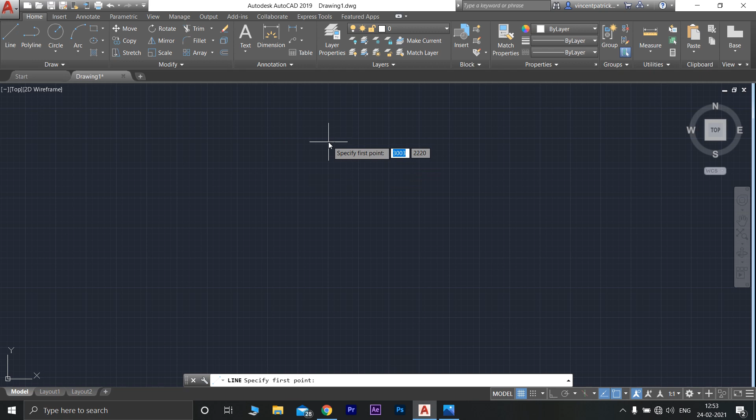So open AutoCAD. The first command you have to give is limits, and the lower left corner should be 210 and upper right corner should be 297. So the next command you have to give is units, and the precision should be 0. Okay, so now go to line, and make sure ortho is on.

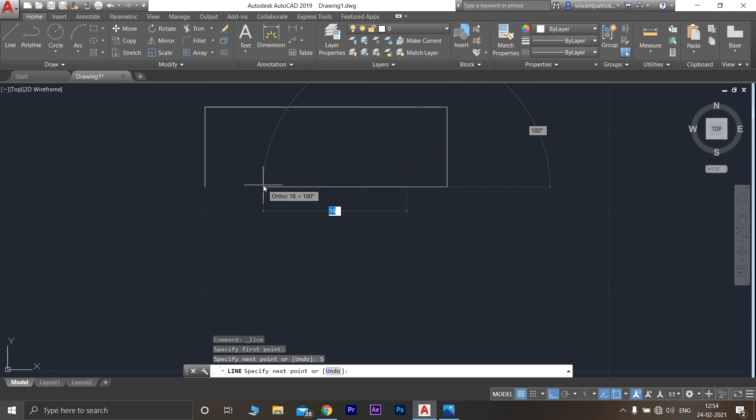So now the length of this one will be 30 and again 10. Before drawing this diagram, the length of this one will be 10, so the length of this gap will be 5 and 5. So yeah, again line, so 5 mm, 20 mm, and join this.

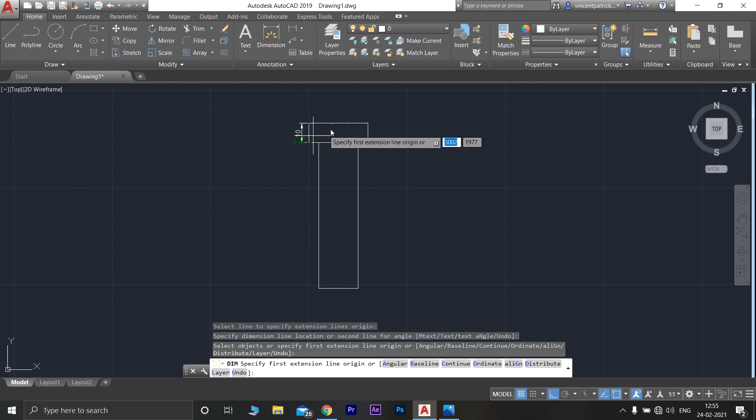The entire length of this will be 75. Go to here. So from this point I have to draw it for 75 mm. And then this will be 20. Now join this. So this will be the knuckle pin. Once completed, give the dimensions. This will be the knuckle pin. Dimensions we can do at the last.

So now we will draw the eye end rod, next one. Now the length of this is given as 26 mm. And the total length, check the top view, from here to this point it is given as 70, and the diameter of the circle is given as 40, so radius will be 20. So from this point to here it will be 20, so 70 plus 20, 90. The entire length of this will be 90.

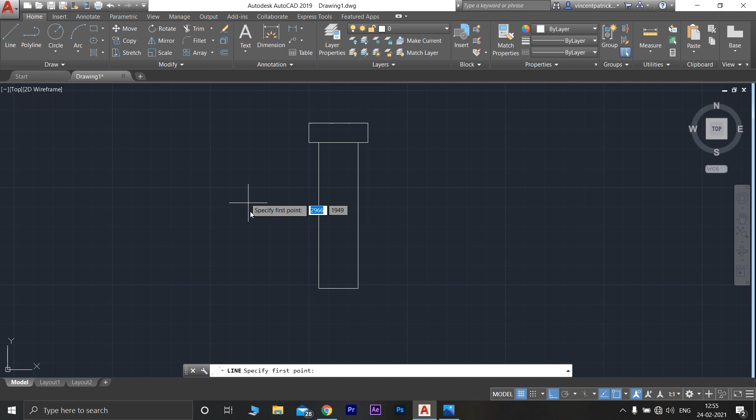Go to line. So from here I have to draw a line for 90 mm. So it's given as 26. 26, 90. So we have drawn this. Next, the length of this is given as 35 mm. So go to line. From here draw a line for 35 mm.

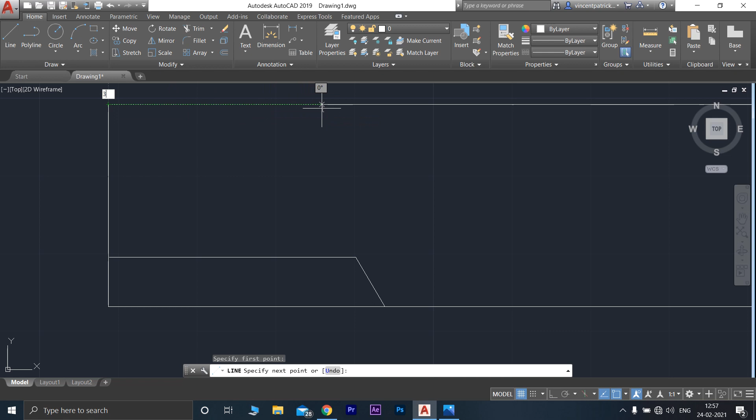So connect it like this. Same way you do on the other side. 35 mm. From here 6 mm.

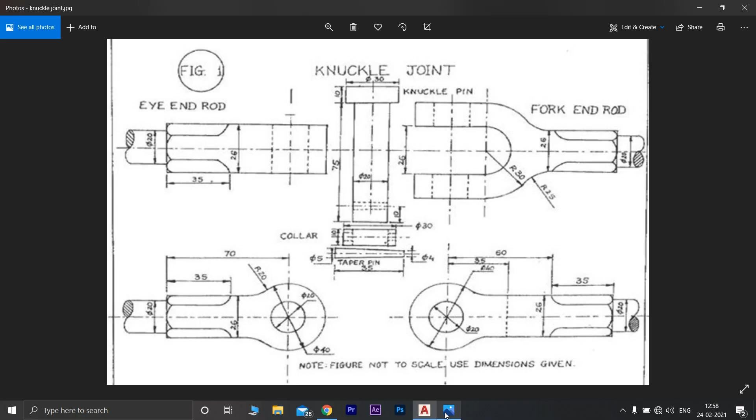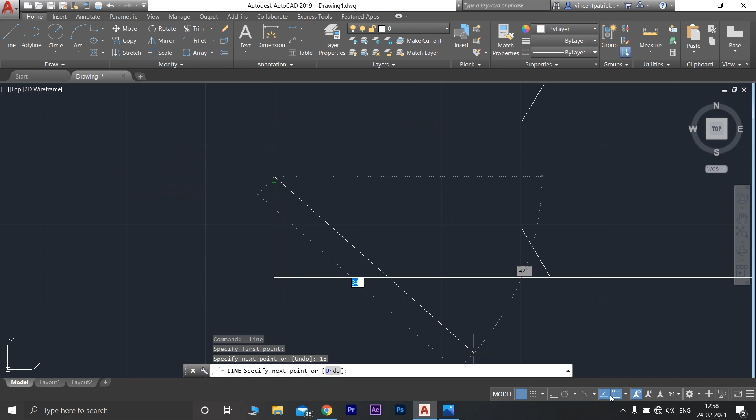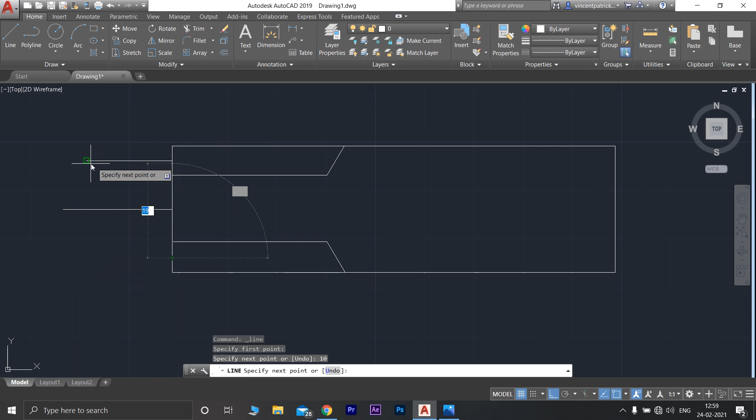Now we have to draw this by 20 mm length. So to here, create a center point that is at 13 mm. So the height is given as 20 mm. So go to line from here, 10 mm, draw like this, and from here 10 mm. Now delete this reference line. So this will be the eye end rod.

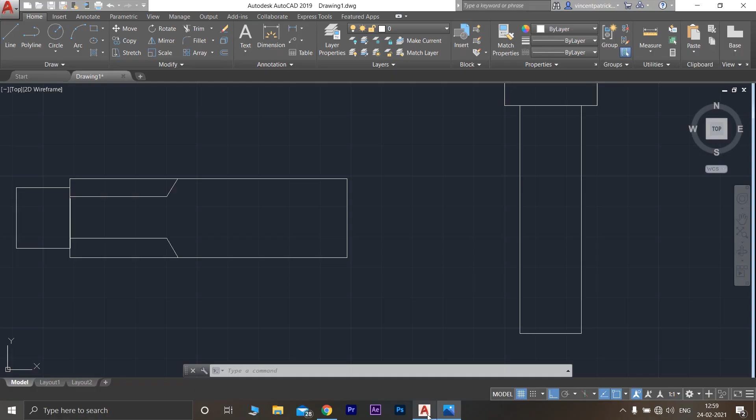Now we will design the fork and rod. So to design the fork and rod, first draw the center line. So this will be the center line. So the gap of this is given as 26 mm. Go to line. So top 13 mm and bottom 13 mm. So from here 113 mm. So this will be the gap, this space. So the length of this one

so the radius is given as 30.

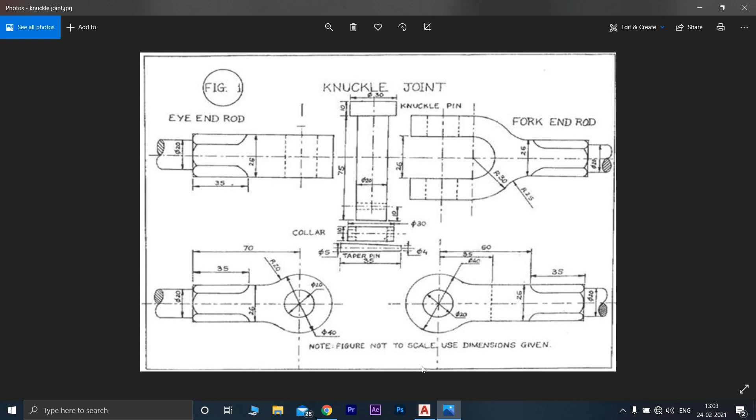So till this one it's given as 35 from center, and the diameter from here is given as 40, so it will be 20. So the length will be from here 35 plus 20, so it will be 55. From here 55, from here 55, you can delete this reference line.

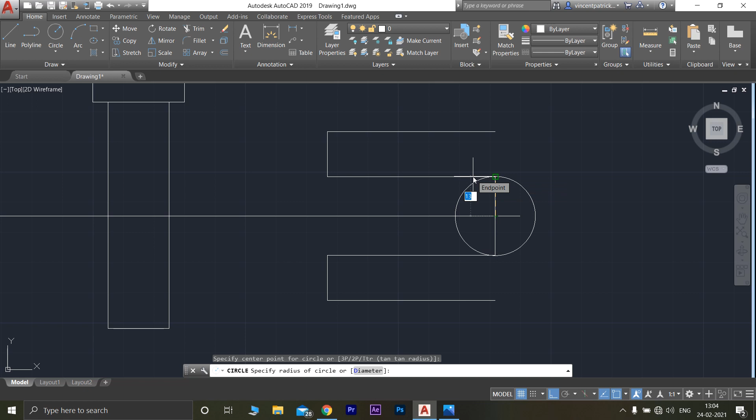Now the next step, we have to draw this arc. So now what you have to do is draw a line like this. Now go to circle, select this center point, connect it like this. Now delete this, don't delete the reference line, go to trim, select this object, press enter and select this off, and it will be trimmed off. Now you can delete this one.

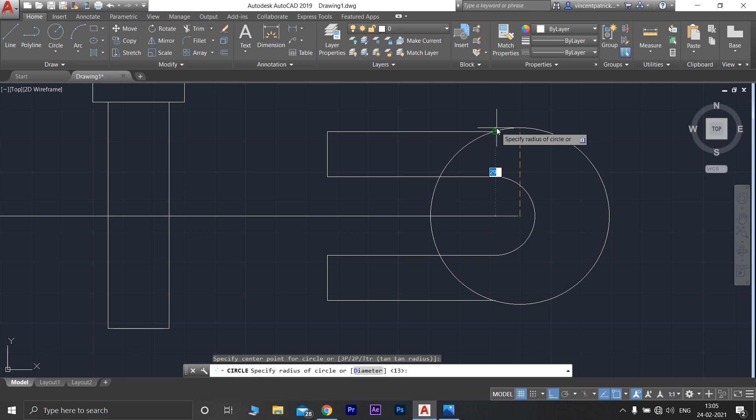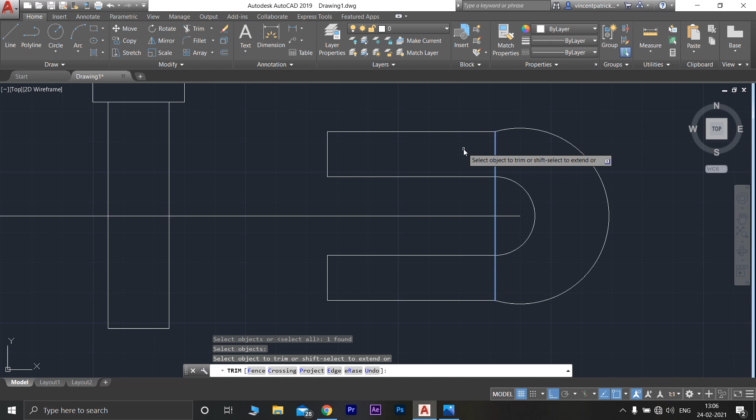So the radius of this one is given as 30 mm. So from here draw a circle in such a way it connects both the lines of this. Now go to line, from here draw a line towards here and select this line, press enter, and now trim this one. Now delete this reference line.

What you have to do is, from this point the length is given. From here to here, from this center point, it's given as 60, and here 35.

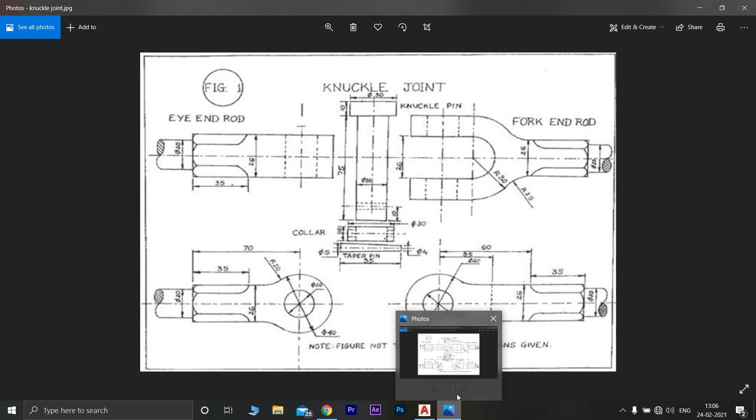Go to AutoCAD and select this line, and from this point draw a line for 60 mm.

The same way, from here I draw a line for 60 mm. So what you have to do next is connect these two lines. To trim...

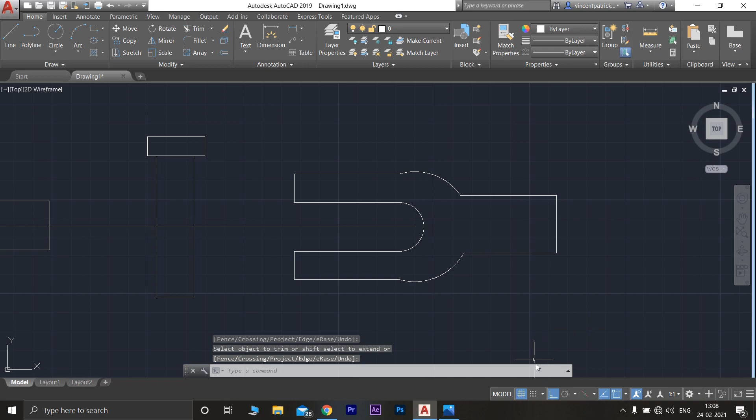Now go to fillet. You have to specify the radius here, let's give 25. Now you have to select the first object, select this one and select this one.

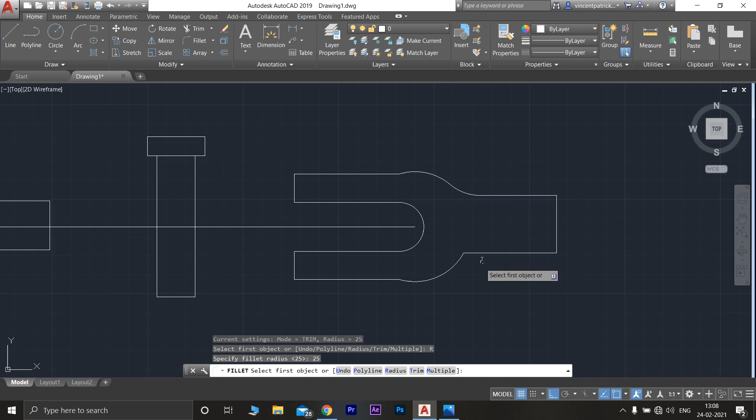Now repeat the same procedure. Go to radius 25, select the first object, now select the second object.

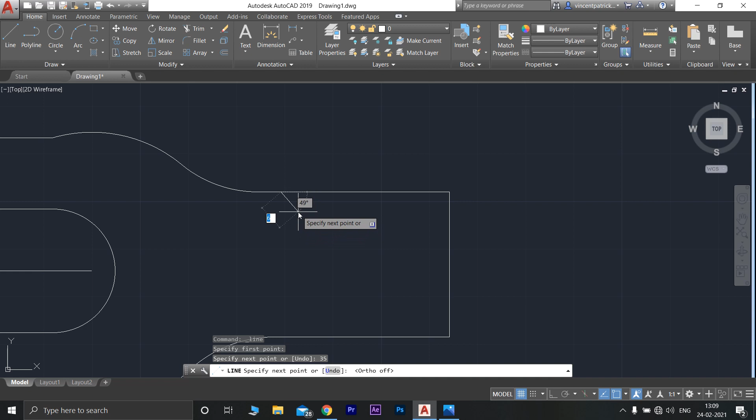So now we have to draw this one. Go to line, from here draw a line for 35 mm. Now from this point draw another line for 35 mm again.

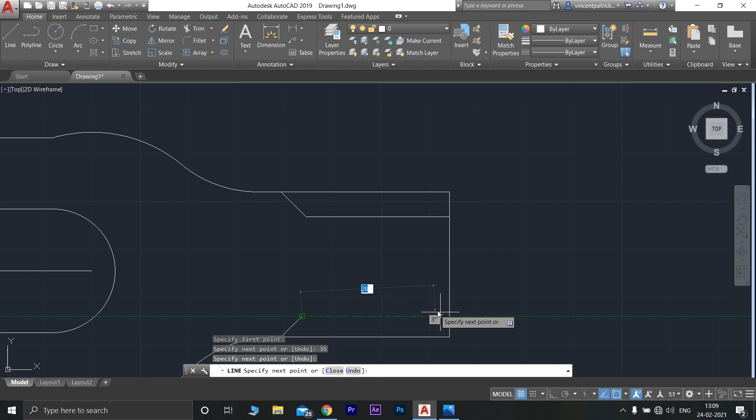So this will be the fork and rod. Now the next step is we have to draw this collar. The collar has a length of 10 mm and 30 mm diameter.

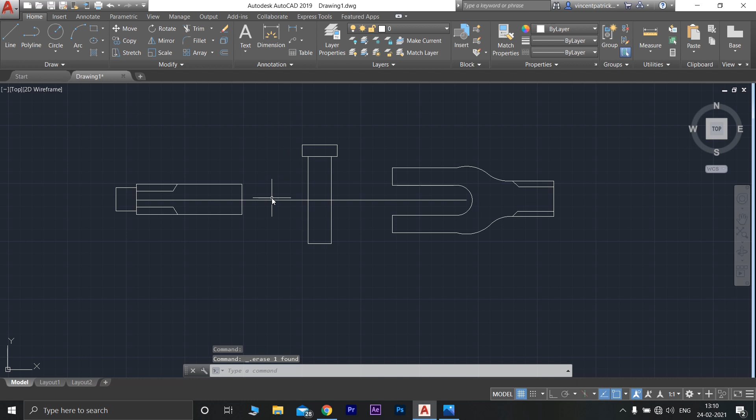Delete the center line. Now go to line, entire length will be 10 and this will be 30. Again 10 and 30. So this will be the collar and the taper pin.

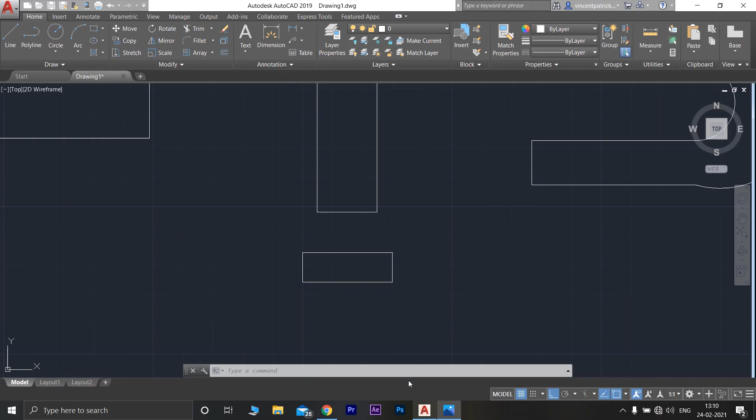One side the length should be 5 and other side should be 2. So first what you have to do is we have to draw a center line.

So entire length of the pin is given as 35. So now first draw a center line. So go to line. One side it should be 5.

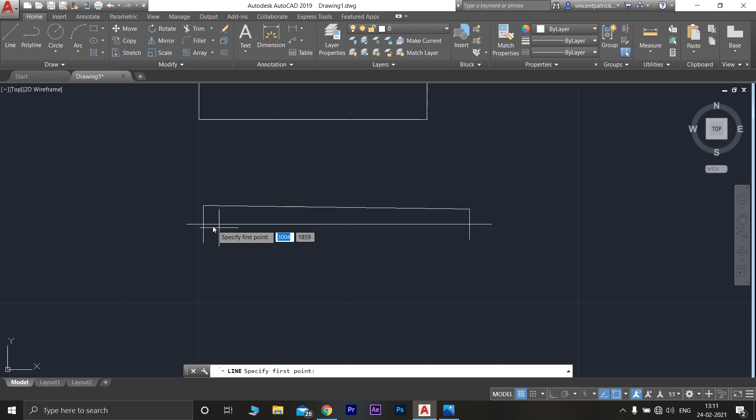Now what you have to do is connect these two lines. So this will be the taper pin. Now delete the reference line. So this will be the taper pin. This will be the top view.

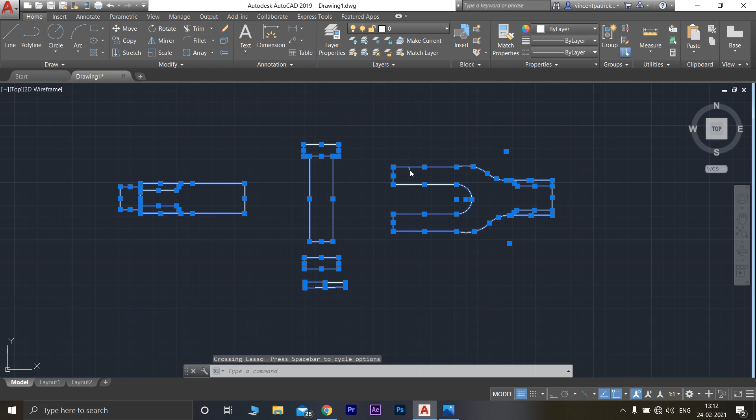So it's enough that we draw the front view and assemble it. Before assembling it, create a copy of this entire diagram. Select all the diagram and make a copy, select one point, move it aside.

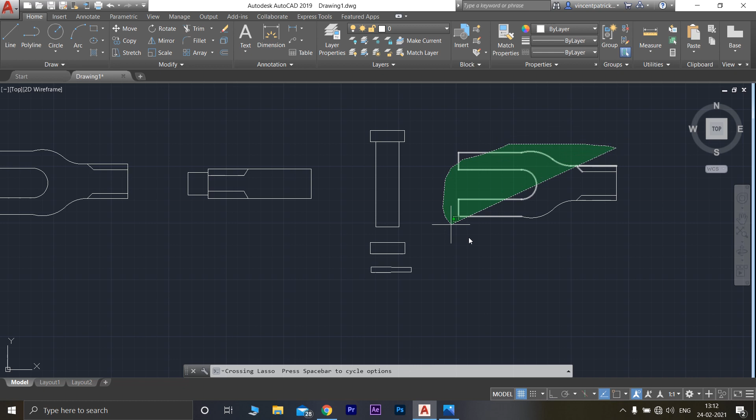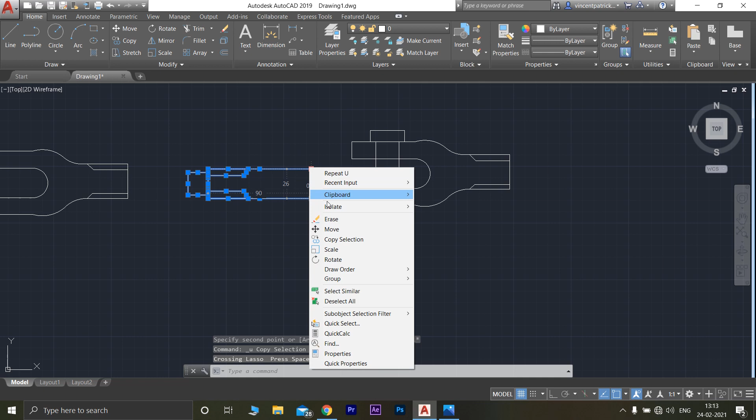So now what you have to do is we have to assemble this. First select this entire section, right click and click on move. Select this one and click on move, select this point and move it like this so that it should fit exactly into that gap.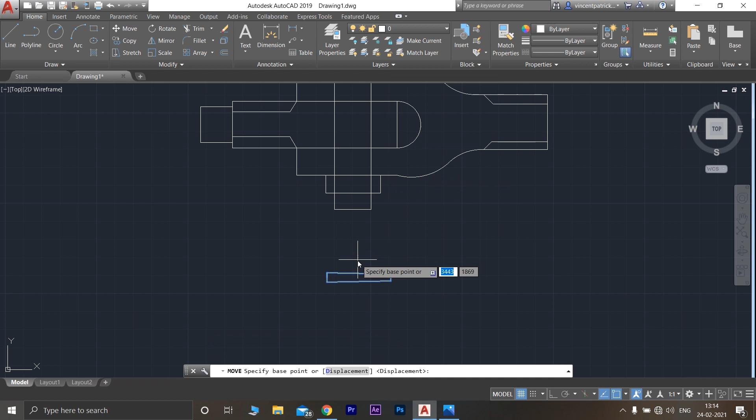Now we have to move this part, select it, select move, take this point, fit it like this. Now we have to move this one taper pin, select it, move and place it like this.

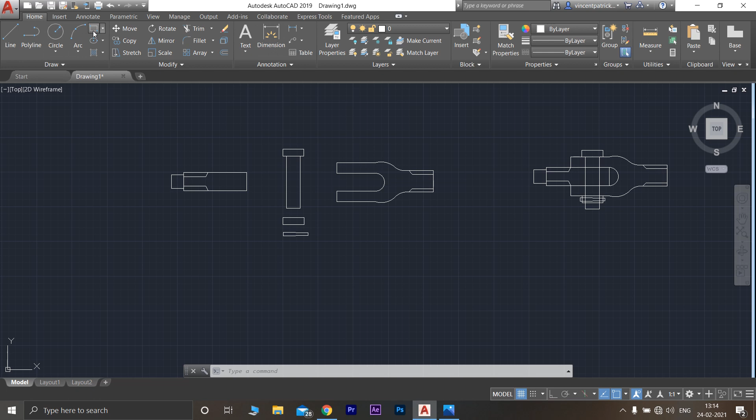So this is the assembly diagram of the knuckle joint. At last what you have to do is go to rectangle, draw a rectangle like this.

So draw a rectangle like this, select the entire assembled section and select move, and bring the entire diagram towards here. Again go to rectangle.

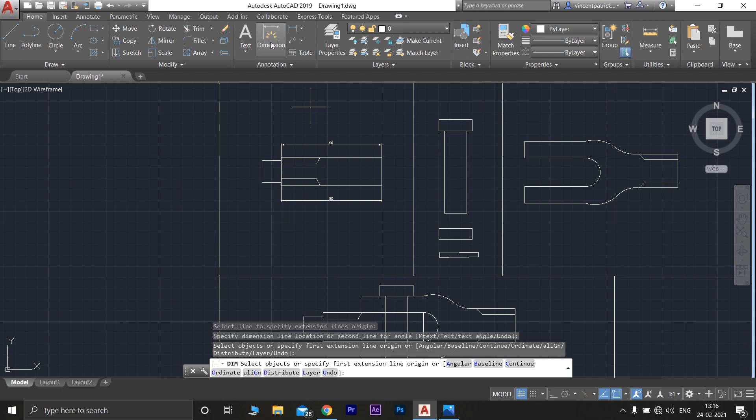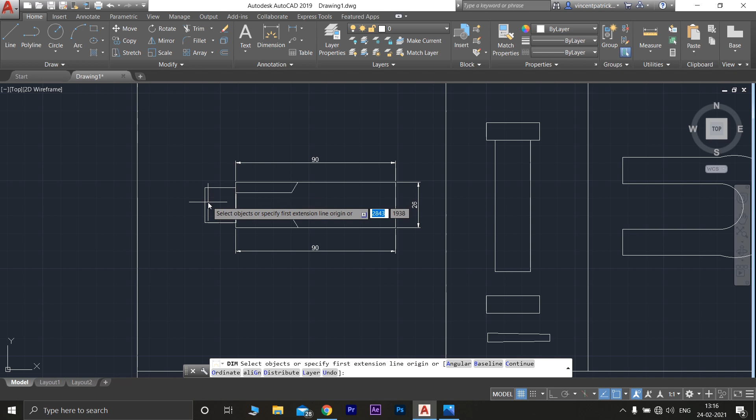So the next step you have to do is give those dimensions. Make sure that the dimensions are not given inside the diagram, it should always be outside the diagram.

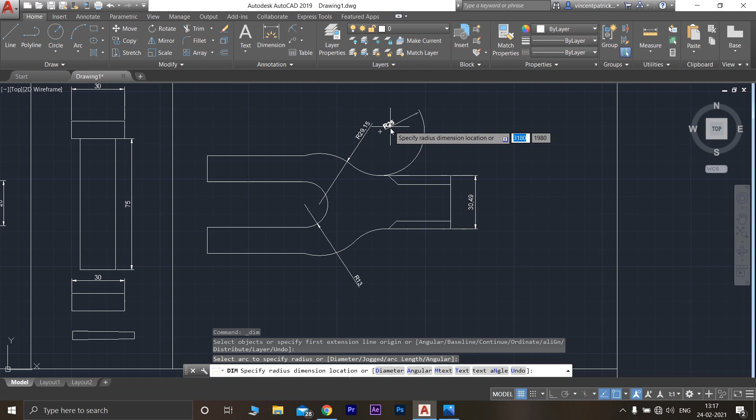So this will be the assembled view. In this part you have to mention the projection, which projection you used. So in this diagram we have used third angle projection, so you have to mention the symbol here.

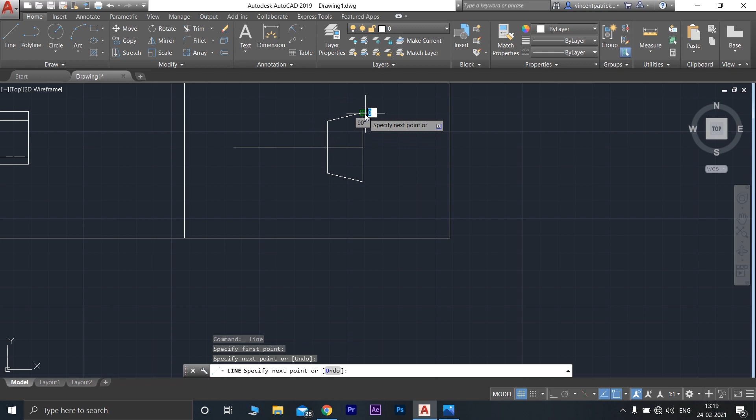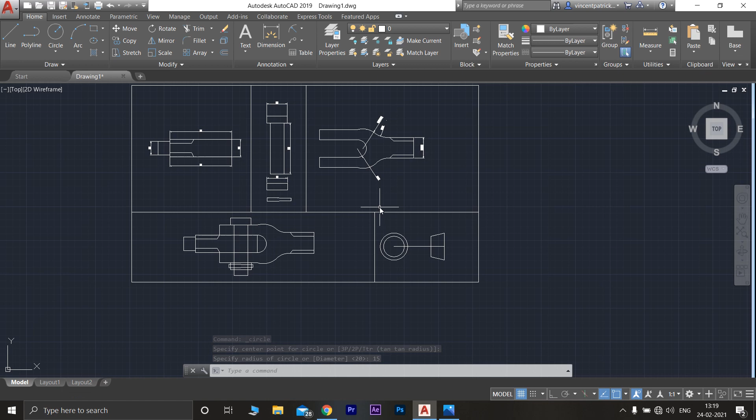So the symbol will be like a truncated cone, and this will be the third angle projection symbol. So once you... now we have to give notation, go to text.